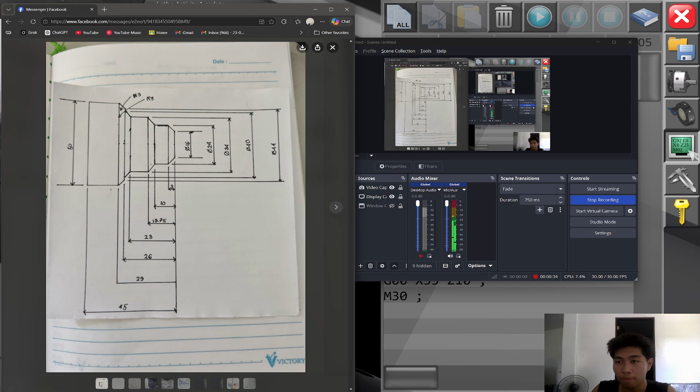CNC meeting. This figure will be made using the CNC simulator, the lathe machine simulator. Proceeding to the simulator software.

The codes are for this figure. O0001 is the program number. G97 is the absolute or constant RPM mode. M03 is spindle clockwise. S is for spindle speed of 1000 RPM. T0101 is tool number 1, offset 1, which is set.

Then proceeding to G0 X55 Z10. G0, the rapid traverse going to the coordinates X55 and Z10, the starting point for creating the figure using the lathe machine. Then Z2 for a closer position of the tool to start the program.

Then G71, which is composed of two lines. The first line is G71 having the depth of cut of U of 0.5 and a retract amount of 0.5.

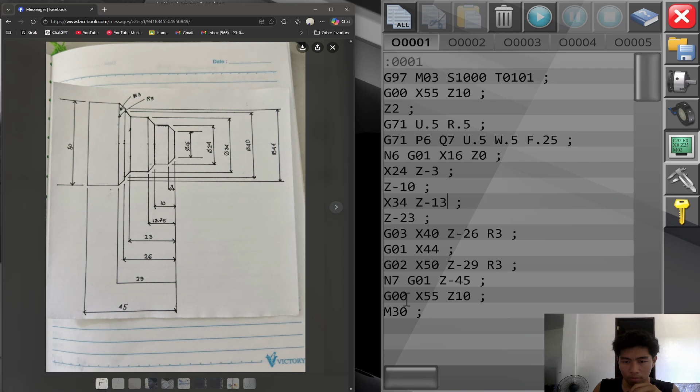Then the program will stop, or the sequence on N7, in the linear interpolation going backward to the Z minus 45 coordinate. Then after that it would go to the X55 Z10 coordinate, G0 rapid traverse, the same coordinates as the starting point. Then M30 for program end and reset.

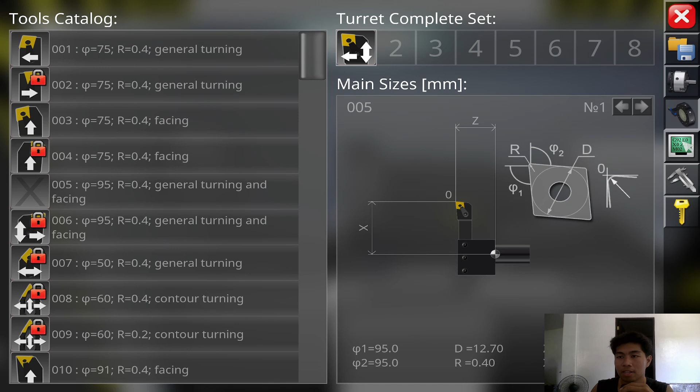Oh wait. Okay, start the program.

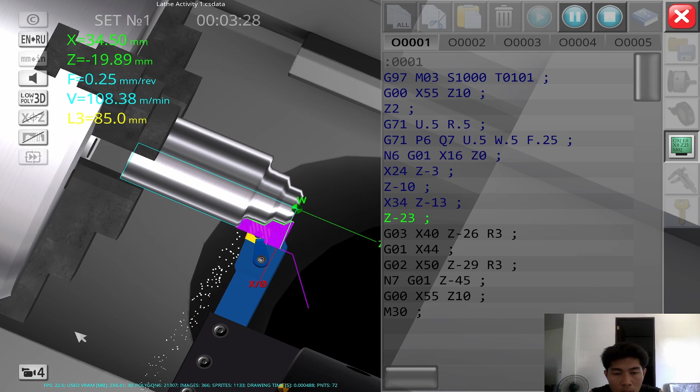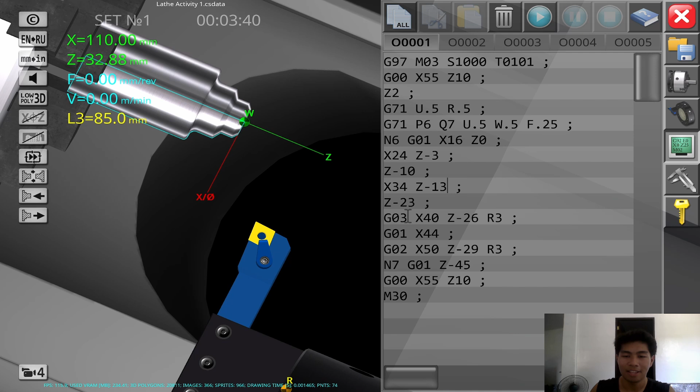For the final addition or explanation, what is shown in the meeting, the G03 and G02 are opposite. It goes in accordance where the cutting is not applied well because it's not cutting properly. It goes in accordance, therefore it only slides, glides, or grinds and not really cuts. That's why it is changed, for it to have friction or better cutting or contact on the tool and the stock. That's why this G03 and G02 is changed.

Another addition, I forgot to explain it. The cutting of the stock starts from the outer surface and not the middle. So my explanation was in the opposite way. Basically, it starts at the outer part, then moves on its way towards the inner middle part.